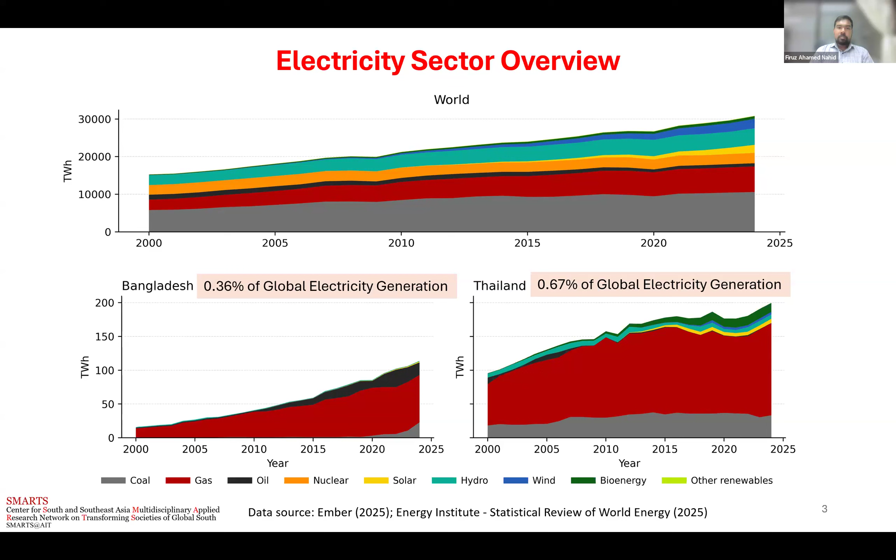Now, if we look at per capita power generation on a global scale, by the end of 2024, the global per capita power generation is around 3.78 megawatt hours, mostly coming from coal. Compared with that, Thailand's per capita consumption is around 27% lower than the world average. But in Bangladesh, the per capita generation is almost 83% lower than the global average.

So it shows that consumption in Bangladesh is far lower compared to the global average, and also compared with Thailand. In Bangladesh, the per capita power generation is very low.

But both of these countries, Thailand and Bangladesh, are developing countries, and it is expected that over the next 2-3 decades, economic expansion will happen and their power generation capability will increase. And it is expected that both countries will include more renewables in their generation mix. At this stage, in both countries, the per capita generation is dominated by natural gas.

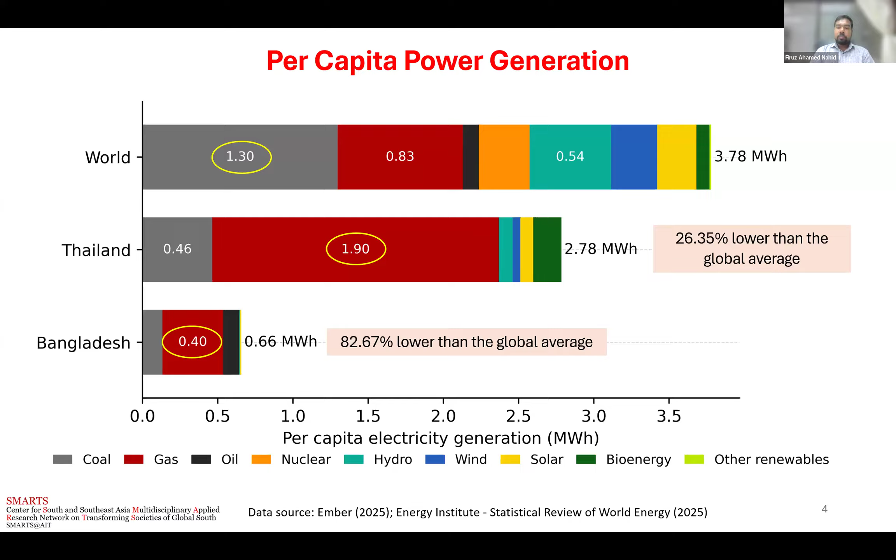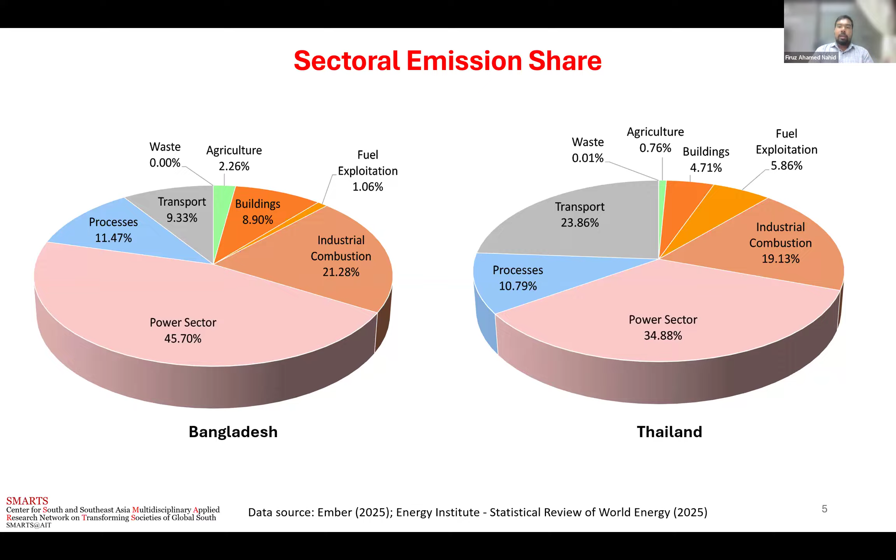Then if we look at the sectoral emissions in both countries, the power sector dominates the emissions, followed by industrial combustion. In Thailand, significant emissions also come from the transport sector. So this gives us an idea of why we should focus on power sector decarbonization to lead towards a cleaner future. Now, let's have a look at the major power sector policies taken in Bangladesh.

So in 2010, the target was revised, where 34 gigawatts of power capacity was targeted by 2030. And in 2010, the plan was revised to shift the focus to coal dominance, with a target of around 50% coal in the generation mix.

Now, in 2016, it was further revised based on the energy efficiency and conservation master plan. In 2016, demand side priority was implemented in Bangladesh, targeting 20% energy efficiency in demand by 2030. Through this, the target is at least 16% lower energy consumption by 2030 compared to the business as usual scenario.

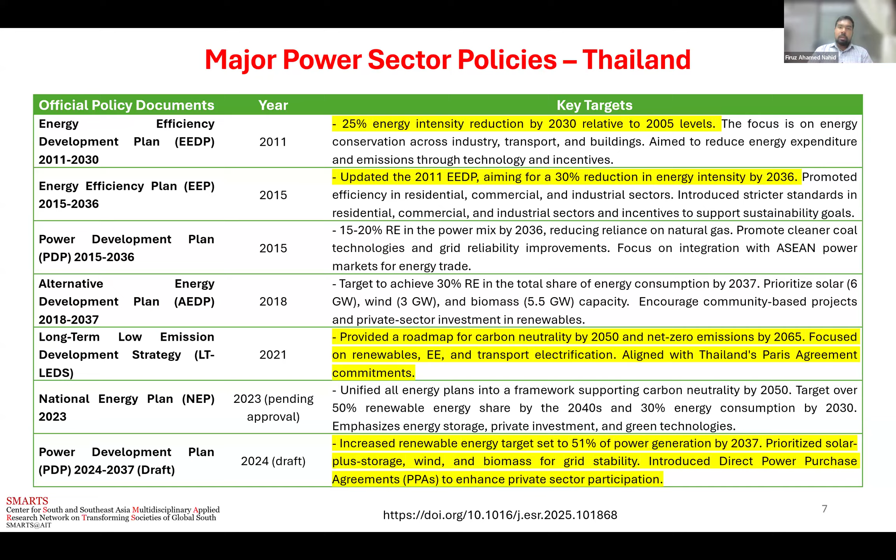Now let's have a look at the studies which have been done in Bangladesh. So we found that there are several studies that talk about power sector expansions. And first, our target was to see what sorts of technology they have used, whether they have implemented demand side measures or not. So we found that most of the studies do not talk about demand side measures in Bangladesh. They mostly focus on capacity expansions to the utilization of renewable energies.

And if we look at the coverage of these models, we found that almost all of the models focused on national scale. Only one study covered a local scale, which was a provincial scale. And most of the studies covered only the electricity sector. Other sectors such as transport, industry, residential, agriculture were rarely covered. In terms of time horizon, we found that the models covered from short term to long term scenarios.

In terms of low carbon technologies, the most applications we found were of hydro, solar, and wind. A few studies covered nuclear as well, and a few studies included biomass energies. And in terms of storage, we see most of the studies included batteries. Only one study talks about hydrogen, but storages such as pumped hydro storage or compressed air or thermal energy storage were not found in the modeling studies except one study.

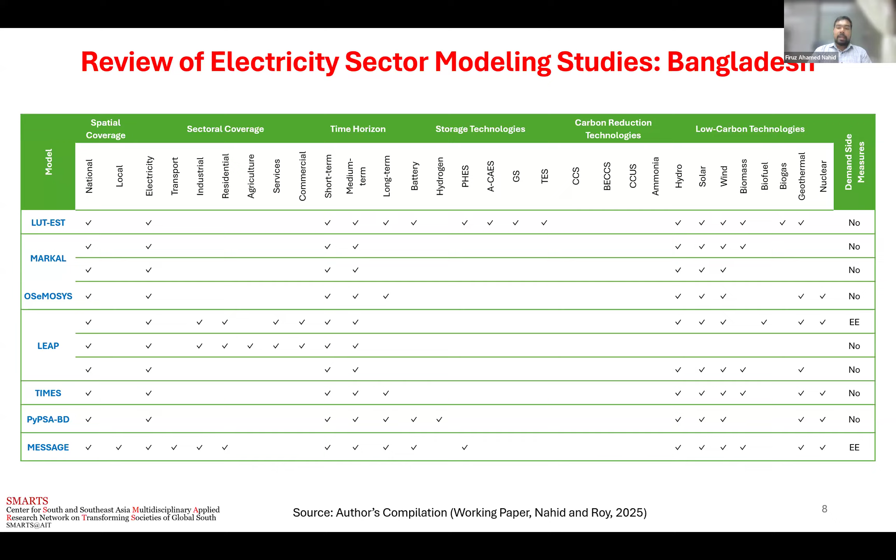Similarly, for Thailand, while we were looking at the studies, we found that energy efficiency as a demand side measure has been included in the modeling studies. Most of the studies in Thailand we found are AIM models. And we found that here in Thailand also, all the models are of national scale, and they cover sectors like electricity, transport, industries, and the time horizon, like Bangladesh, ranges from short term to long term. And in terms of storages, hydrogen was found as a storage technology for Thailand studies. One study with lithium-ion batteries.

And in terms of low carbon technologies, hydro has been utilized, solar, wind, and as Thailand also prioritized, biomass was also found. For Thailand, no nuclear application has been found, and also in Thailand's national plan, there is no big application of nuclear. Only a few small scale modular reactor applications are there. So we found that nuclear applications are rarely modeled for the case of Thailand.

So if we summarize the review for these two countries, we see that although Thailand has the application of energy efficiency, which is a demand side measure, in the studies, demand side solutions like demand side flexibility are not there, because many of the studies mentioned that in the modeling they found curtailments from solar and wind, and this is a loss of generation. So demand side flexibility could be a better option as a demand side measure.

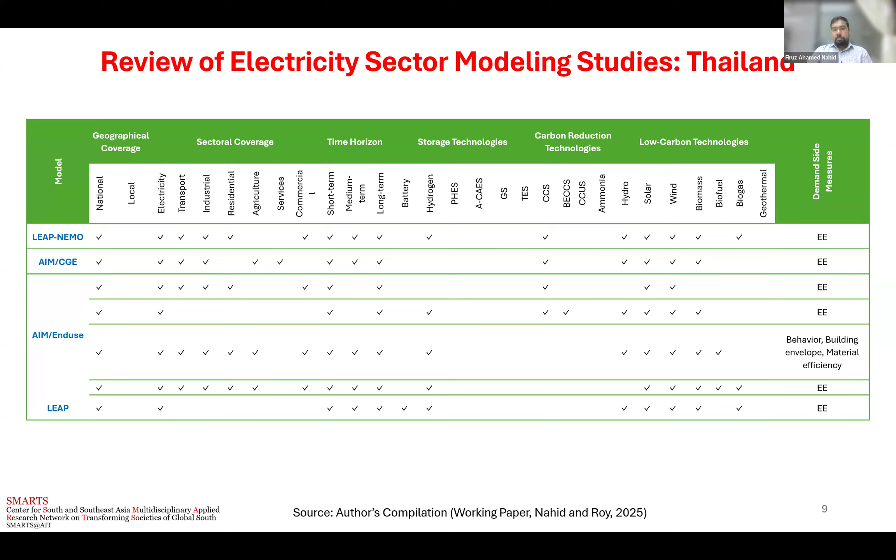Same for Bangladesh, although we found one study with energy efficiency, we didn't see any sort of demand side flexibility in the models. So based on these reviews and the status of the countries and the policies, let us see what we did as part of the electricity sector model. So what research questions we had taken.

So we tried to see how an integration of demand side measures such as energy efficiency and demand side flexibility with supply side capacity expansion through our modeling framework can impact the optimal capacity trajectories as well as the emissions. And we compare our results with supply only planning so that we can identify the influence or the importance of integrating demand side solutions into the system.

And then over this transition, how much storage is needed and how it is going to support more renewables into the system. And finally, most of our study quantifies the socio-economic implications, for example, the financial resource mobilization, the land footprint, the electricity affordability, and the job creation potentials over short to long-term time horizons. Now, the studies that we reviewed rarely include these socioeconomic implications.

Now, in terms of our contribution through these modeling studies, we developed this model, PyPSA-BD or PyPSA-TH, which are open source country-specific models that integrate both demand and supply side interventions to develop short, medium, and long-term scenarios towards a 100% clean electricity pathway. It co-optimizes both capacity investment and dispatch under operational and policy constraints, which we design based on our scenarios.

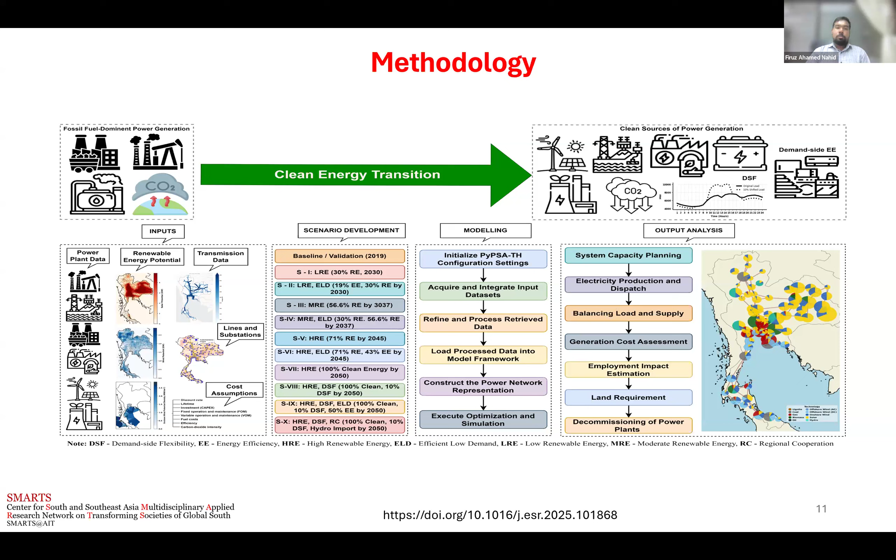So let's see what the scenarios are and how we do that. For Bangladesh, we did around 8 scenarios, including one reference scenario. The reference scenario basically represents a 2019 policy frozen scenario, and 2019 was also our model validation year. So if we talk about a particular year, let's say 2030, we have 3 scenarios. One scenario includes only the government pledges, like 30% renewable capacities, and Bangladesh also targeted

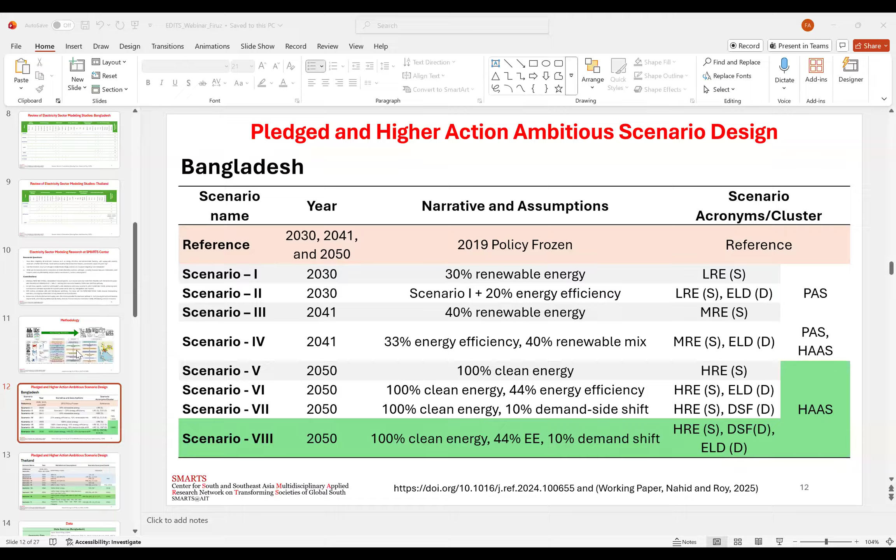I think we lost Firuz. Maybe there is a network glitch or something. Yeah, I think Firuz is back. Okay, let's get back. Where did I get lost exactly? After which slide? Can anyone confirm? Yeah, in the scenarios slide. Here? Yeah. Oh, I'm so sorry, I think there was an internet issue. Yeah, it's okay. Okay, let me just quickly recap what I said here.

So how did we design the scenarios? Basically, we have a validation scenario for 2019, and then we have a reference scenario, which we also call the 2019 policy frozen scenario, so that we can identify, if the pledges were not met or the higher action scenarios were not taken, how the power sector trajectory looks.

So for example, if we look at the year 2030, we have three scenarios basically. Scenario 1 is a 30% renewable energy expansion. Scenario 2, on top of scenario 1, includes 20% energy efficiency. Both of these are pledged action scenarios because the government has its own target that in 2030, 30% renewable and 20% energy efficiency should be there. And we can also compare these results with the 2030 reference scenario if these are not met.

Similarly, for 2041, the government has a target of 40% renewable energy. We call it the pledged action scenario. Then we added 33% demand side energy efficiency. This 33% has been taken based on the year by year increase up to 2030, and then we calculated and set the value.

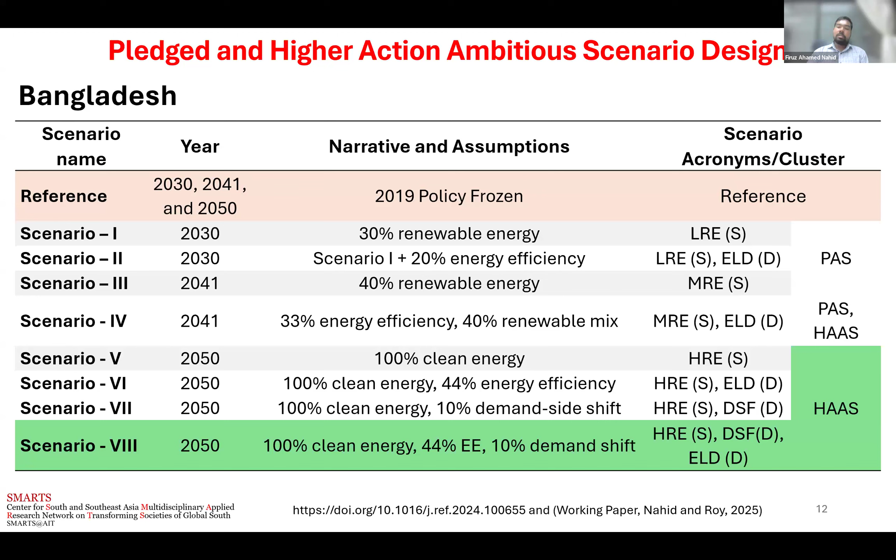For Thailand also, it's a similar process; the government has its own targets. So accordingly, we have a higher action ambitious scenario. We have increased the penetration of renewable energies, energy efficiency and demand side load shift by calculating from the pledged years. So a similar process of setting the scenario targets.

Now, let me give you a brief idea of what sorts of data we need. Although we have mentioned during the methodological framework what sorts of data we need, I would like to name a few of the sources from where we have taken that data. So the Shared Socioeconomic Pathways helped us to get the load data. Bangladesh Power Development Board and Bangladesh Power Generation Companies annual reports were a good source of assumptions for our model.

OpenStreetMap helps us to validate the transmission networks, and IEPMP, which is the Integrated Energy and Power Sector Master Plan. We have other policies like NDCs, Energy Efficiency and Conservation Master Plans, etc. So these are a few of the government reports which help us to take the proper assumptions, which are basically country, Bangladesh specific, so that all the assumptions, all the values that we have taken are from different official

sources of Bangladeshi reports. Similar has been done for Thailand, and for Thailand, the major sources are EGAT, which basically controls the generation and transmission in Thailand, and two other sources are MEA and PEA, which are the Metropolitan and Provincial Electricity Authority. So through these official sources, we have sourced our data to use in our model so that we can claim that our model uses the official data for both of these country perspectives.

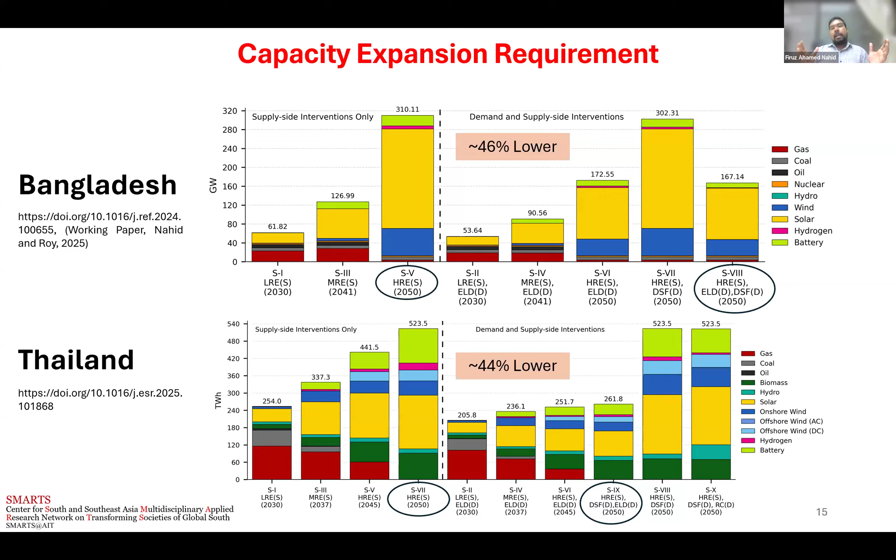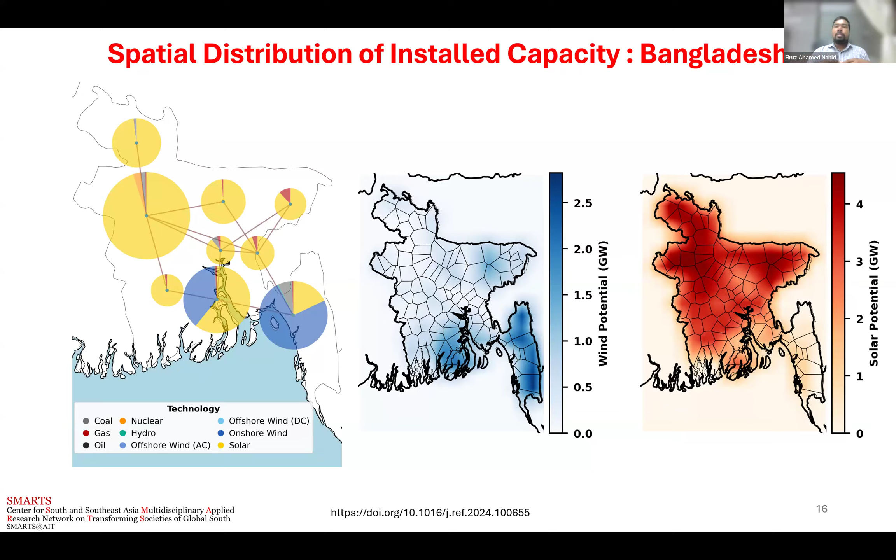Our model also has one advantage, that we can map where the power plants are located, in which places the new installed capacity has happened, and we also map this with the solar and wind potential. So in Bangladesh, these two figures show the solar potential and wind potential. And if we look at the figure where the solar, wind and nuclear generation has taken place, the model is basically placing the power plants where the resource availability is. So this is also a confirmation the model is building the new power plants in the proper places.

Similar results we have for Thailand here, and here we have shown the potential as a potential density, megawatt per kilometer square. So this is the offshore wind potential and the solar potential. And if you see the map where the generation has taken place, it also follows the resource potentials.

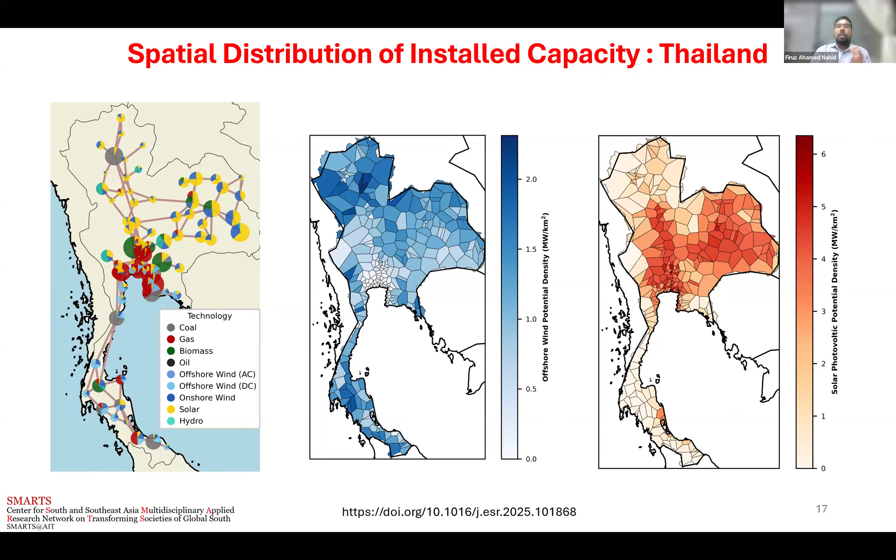And then let's have a look at the financial resource mobilization. As we have already seen, when we include the demand side solutions with the supply side expansion, the capacity expansion gets lower. So the lower capacity expansion also requires lower financial resource mobilization. In terms of value, we see around 43% lower requirement for Bangladesh, where with only supply side you need around 258 billion euros of investment by 2050. With the integration of demand side, the requirement comes to around 144 billion euros.

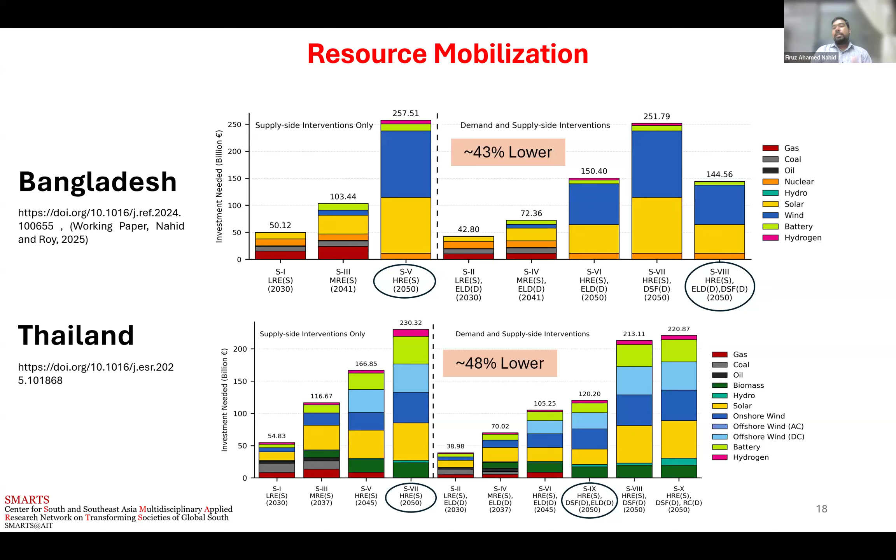And we found similar results for Thailand as well. The financial resource mobilization requirement comes down around 48% when you have energy efficiency and demand side flexibility in the system. If we look at the land footprint, without demand side solutions, around 2.5% of Bangladesh's total land is required for the capacity expansion from solar and wind. But when we integrate the demand side solutions, the requirement comes down to only 1.32% of the total land. So there is a significant reduction in the land footprint as well.

Now, as you know, Bangladesh is a densely populated country. Moreover, the economy also largely depends on agriculture. So potential collision between agricultural lands and this renewable expansion could be a point of conflict. But as we have seen, by integrating the demand side solutions into the system, we really don't need that much land. And through the review of literature, we have also seen that with the available rooftops, if floating solar is implemented, and if wasteland is utilized properly, Bangladesh doesn't need to collide with the agricultural lands. Those available areas would be enough to implement this sort of solar.

Similarly, for Thailand, we found that only supply side expansion requires around 1.09% of the country's total land. But when we include energy efficiency and demand side flexibility, the requirement comes down to 0.61%.

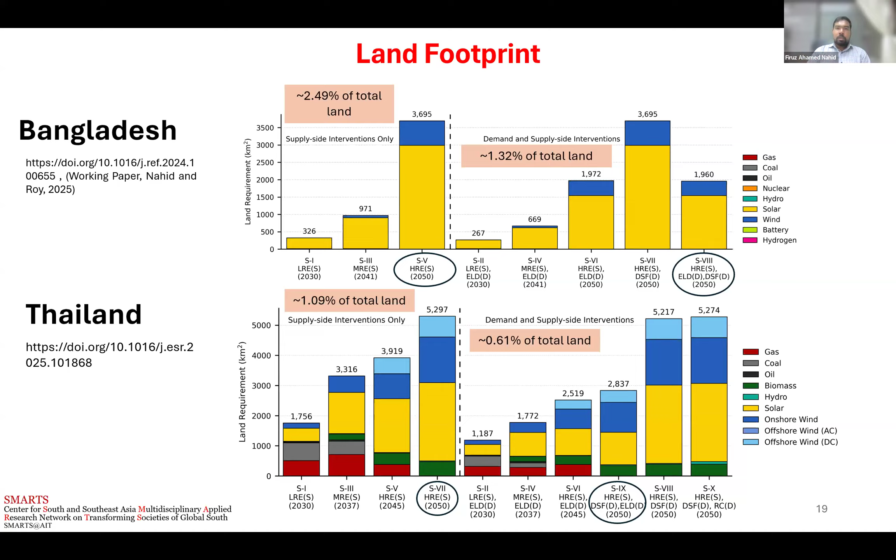If we look at the potential of job creation in both of these countries, we found that by 2050, more jobs will be coming from solar and wind. In Bangladesh, around 6.3 million new jobs are expected if we implement this 100% clean scenario. We divided these jobs into three categories: manufacturing, construction and installation, and operation and maintenance.

Why we have divided these is because we are claiming that this many jobs are coming to the economy, but it all depends on whether you are manufacturing those technologies or whether you are just commissioning and installing and taking care of the operation and maintenance, so that anyone has the idea of how many jobs are expected from which part. And if we look at the demand and supply side integration, it creates even more jobs.

In the case of Bangladesh, around 1 million more jobs are expected from the integration of the demand side into the system. Now, there might be a doubt: if your capacity is going down, then why are more new jobs coming? This is because if you integrate demand side solutions, more and more jobs are expected in the supply chain and also in retrofits. Those give additional new jobs into the system.

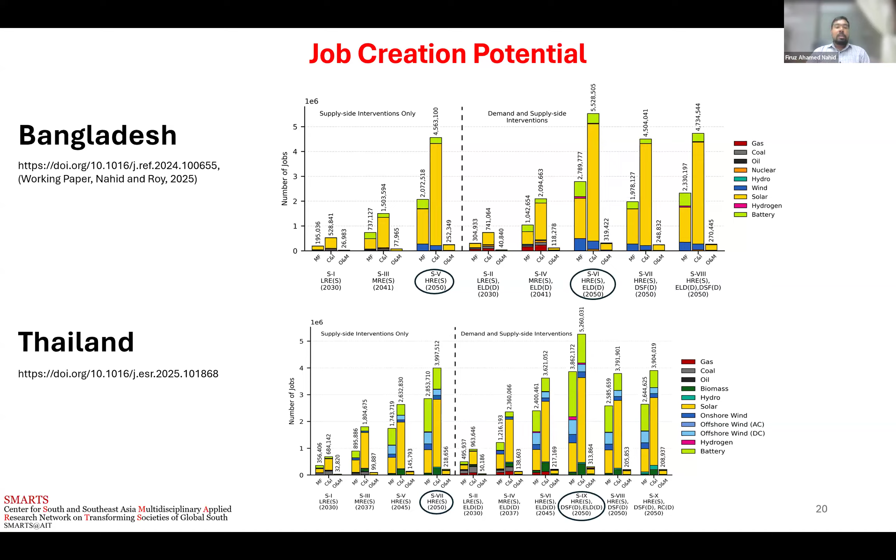Similar results are also seen for the case of Thailand. We see that when we include both demand side solutions and supply side expansion together, the potential of new jobs in the system is greater.

Now, if we look at affordability, the power generation cost in the short term, medium term, and long term, and if we compare the cost of power generation with only supply side and with an integration of demand and supply side, we see that the integration of demand side solutions into the system basically lowers the power generation cost.

In 2050, for the case of Bangladesh, we see that the power generation cost comes down to 49.39 euro per megawatt hour, which is even cheaper than the current generation cost. For the case of Thailand, we also see similar results: the power generation cost comes down when we implement both supply and demand side together.

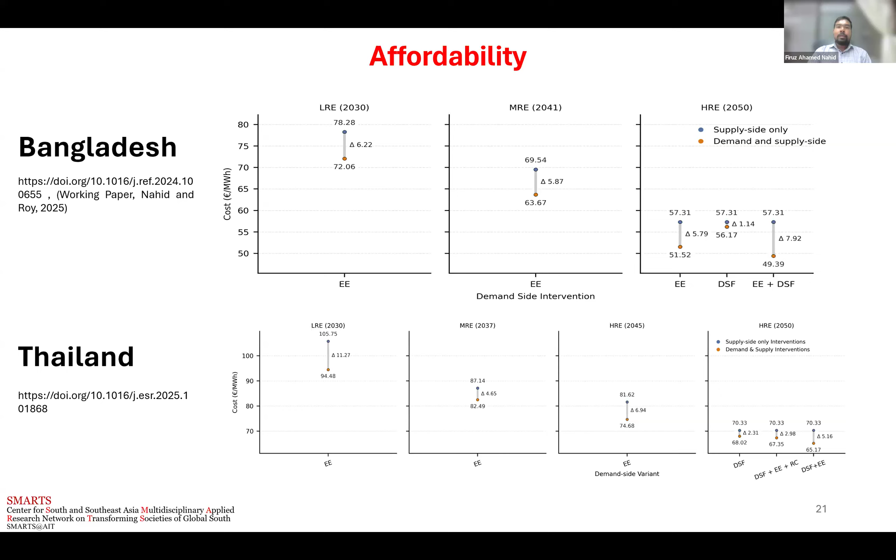If we look at the emission pathway, the red line here shows the 2019 policy frozen pathway. We see that if no policy is implemented, by 2050 Bangladesh's emissions can go as high as almost 200 million tons of CO2. The blue line, which represents the supply side pledges and ambition pathway, ultimately leads to net zero by 2050. But if we compare with the green line, which represents the integration of the demand side with the supply side pledges and ambition pathway, we see that in the near term we have lower emissions compared to the supply side only pathway.

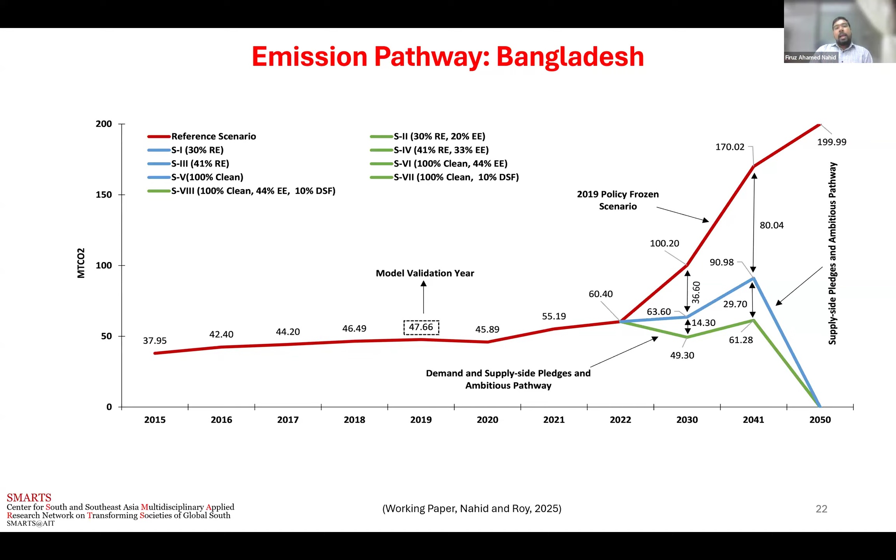So it gives us an idea that if we integrate both demand and supply side strategies into the system, it reduces emissions in the near term and ultimately leads towards a 100% clean energy system by 2050, and that is possible.

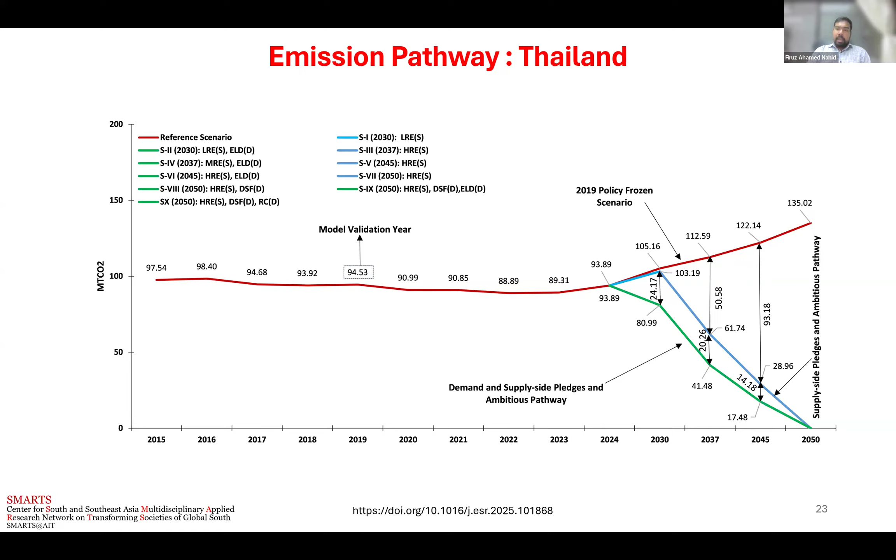And if we look at Thailand, there is a similar trend: supply side only planning has the potential to lead us to a 100% clean energy system with no emissions, but the integration of demand and supply side pledges has better results in the near term. If we look at the years 2030, 2037, 2045, every time the emission is much lower compared to only supply side solutions.

Let's now talk about the key messages from our findings. We conclude that demand side interventions should be prioritized as a primary consideration in power sector policy planning, as we have seen the numerous advantages of integrating demand side interventions. We say that carbon neutrality targets for the national power sector can be better reached by strategically combining demand side interventions with the supply side.

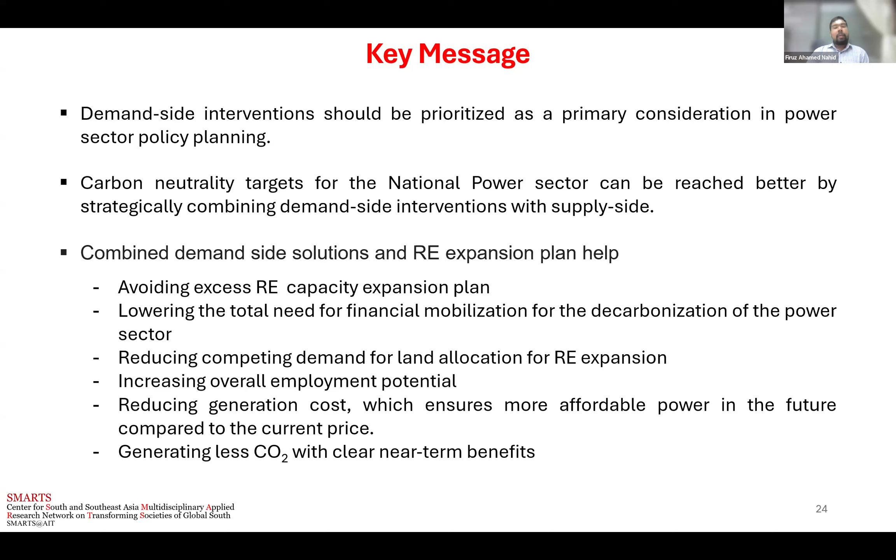This integration will help avoid excess RE capacity expansion. It will lower the total need for financial resource mobilization. It will reduce the competition for land. It will increase the overall employment potential. It will reduce the generation cost, making power more affordable. And it will generate less CO2 with clear near-term benefits. Now, what are our key contributions here?

So the first problem while we were doing this modeling was the access to data. So we have lack of regional open source power sector databases. We don't have a single database where you get different power sector data in a good format. So what we had to do is we had to collect all generation details, which are the list of power plants, the fuel types, the technical efficiencies, capacity factors, when they are coming, different retrofits, the power plants which are in pipelines, their geolocations, and the capex.

We have collected this from all the public and private generation entities, and these are validated with local experts both in Bangladesh and Thailand. We had to collect the local hourly load data. We collected this through official communication. We received those data electronically and we checked and validated with experts.

And another, not problem, but our contribution is model with features for demand side solutions. As we have seen in the literature review, not many of the studies have demand side solutions in their models. So we have integrated demand side solutions like energy efficiency and demand side flexibility. Through this integration, we found that the power sector can be even better modeled with demand side solutions.

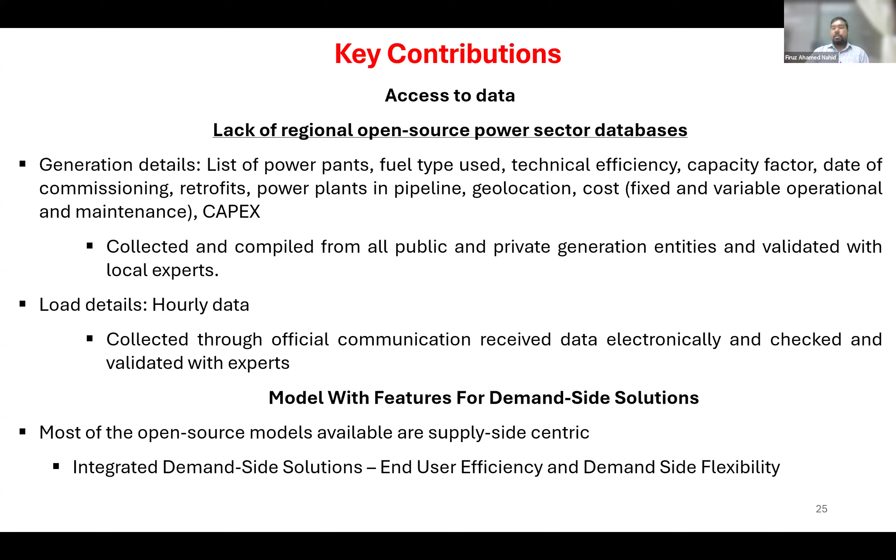And for future research directions, we would say integrate IoT-based demand side flexibility to utilize more renewable energies, model the grid stability and transmission expansion for better demand side management. Sectoral demand and demand side solution technologies need to be featured more. In our research we have used the total demand, not individual sectors, but more sectors can come to better analyze the system. Sector specific demand shift can be more realistically modeled.

Introduction of heat pumps into the model, because in Thailand we have a few potentials of geothermal. In Bangladesh also there is some literature claiming the potential of geothermal, so that can be used. A coupled economy-wide analysis system model for just transition assessments, and enhanced cross-sectoral data and open source regional cooperation to further refine the outcomes and the framework.